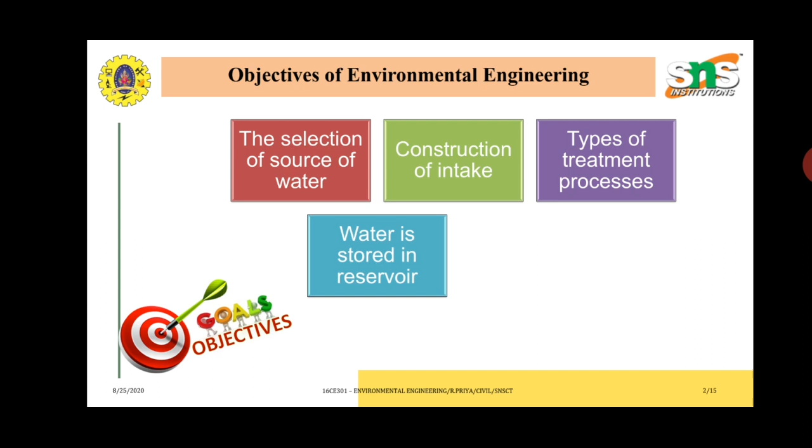After that, the construction of intake. From the river as such, you cannot distribute the water to the entire household. We have to construct an intake structure near a river and store the water there. After storing the water, it has to undergo various treatment processes in order to meet the standards of drinking water. The treated water will be stored in a storage reservoir, and finally it is distributed to the various households.

We have various types of distribution systems for towns, cities, metropolitan cities and cosmopolitan cities. For each and every place we have various types of distribution system, and based on those distribution systems, we will be distributing the water to the households.

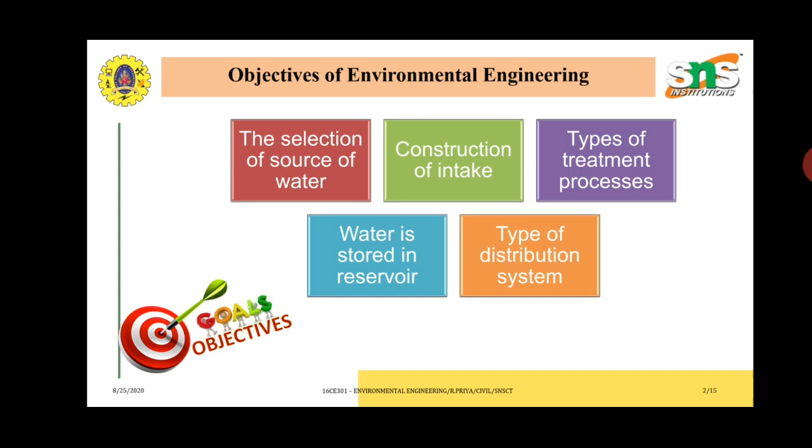I have told you that there are two main categories of environmental engineering: water supply and wastewater engineering. After we use the water in various sources such as industries and households, the wastewater will be released from the households and industries. That wastewater will have many toxic materials or toxic chemicals in it. So it is our duty to reduce the toxic chemicals from the water and dispose it into the land or the river. That is known as wastewater engineering.

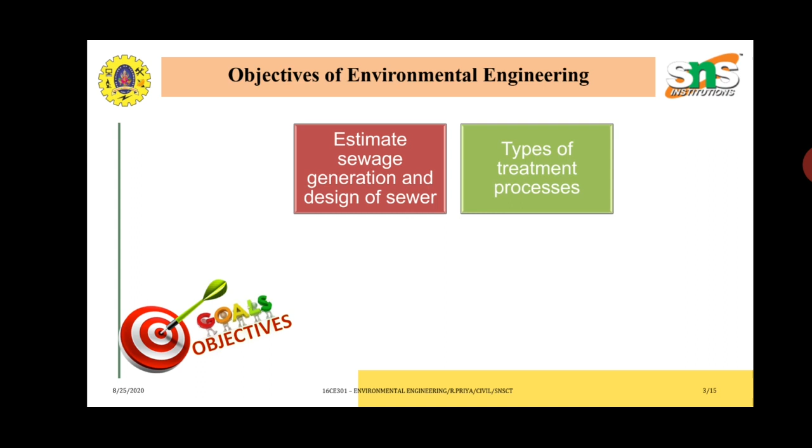In wastewater engineering, you will be studying how to estimate the sewage generation from households, how to design a sewer, the types of treatment processes to be carried out for the wastewater coming out from industries, and the design of various treatment plants. Both together are known as environmental engineering. So here you will be studying about water supply and wastewater, and both combined together is known as the environmental engineering paper.

Seeing the career, you'll know about various government jobs, right? In PWD you'll have various vacancies for those who have pursued civil engineering, because you'll be studying environmental engineering. In PWD, your main role is to estimate or design the various treatment processes, design the various distribution systems, and monitor the quality of the water. So this is why you are studying the environmental engineering paper in civil engineering.

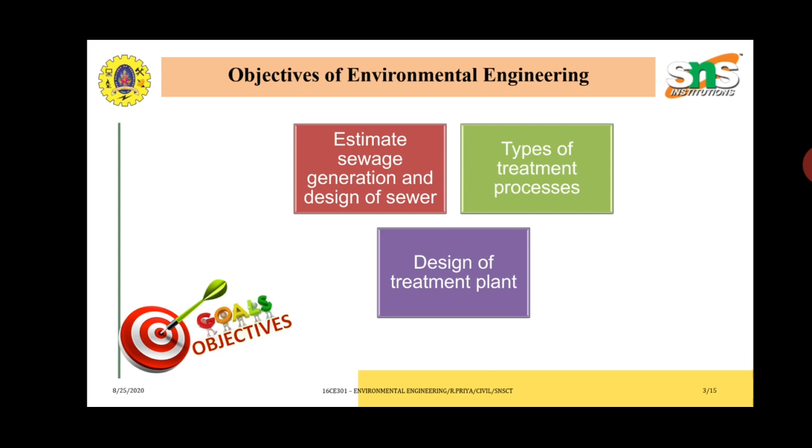So getting into the main units, here you'll be having 5 units. In unit 1 you will be studying about the sources, quality and demand of water. The various topics that you'll be studying are the importance and necessity of water supply engineering, the various sources of water, their suitability and the choice of the source.

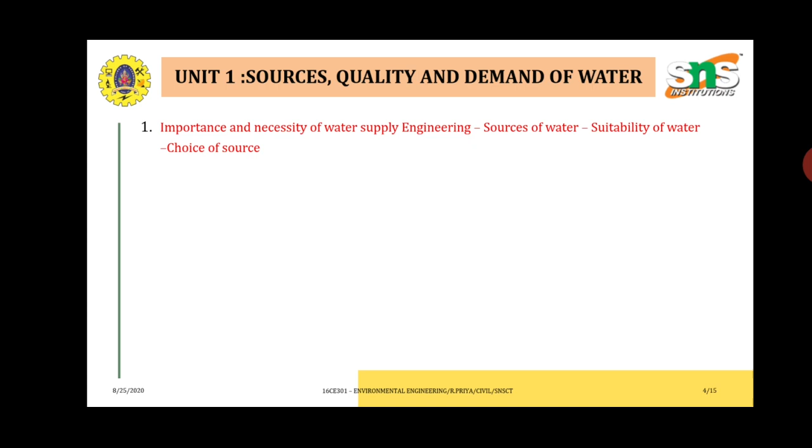Next comes the types of demand of water and how you will be computing the quantity of water. The next topic will be fluctuations in demand and the factors affecting demand. And you'll be studying population forecasting, how you will forecast the population and the various methods to forecast it. Then comes the impurities in water: what are the various impurities in water and how we have to collect water samples for testing.

Then comes the physical tests. What are the various physical tests available to find out the quality of the water, the various chemical tests, and the various biological tests, and the standards of the quality of the water. So these are the main contents that you will be studying in unit 1.

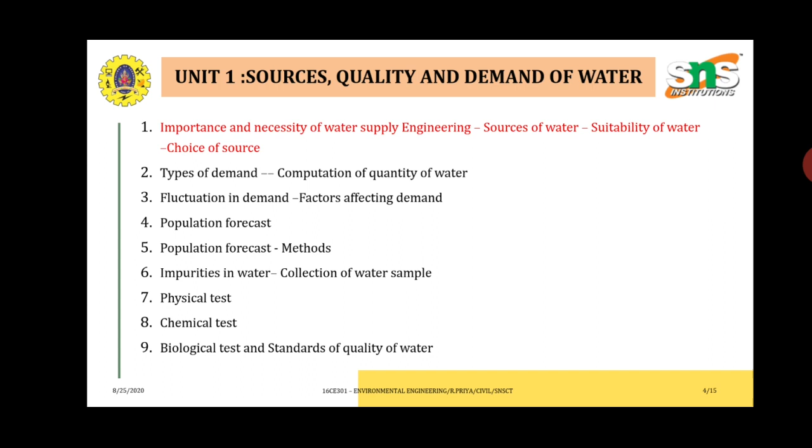So let us see the first topic: the importance and necessity of water supply scheme. What is the main importance and necessity of a water supply scheme? Why do we have to incorporate a system known as a water supply scheme? We all know that 2/3 of the human body is constituted of water. Not only us, plants, animals and all other living beings use water. In day to day life, water is one of the most important things we consume.

The water which we are consuming should be very good quality, it should not contain any impurities. In order to remove the impurities from the water and maintain the standards, this water supply scheme is very important. Next, the utility of water is enormously increasing, and without a well organized public water supply scheme, it is impossible to run our present life. Even a single day without water, the whole system will be spoiled.

The next important one is to provide wholesome water, meaning water which is fit for drinking purposes. In order to provide wholesome water, it is very important to incorporate the water supply scheme. Then we use water for various purposes such as drinking, cooking, bathing, washing, etc. for household things. To do all such works, we need water. So a good water supply scheme is very important for each and every household and also for industries to run day to day life.

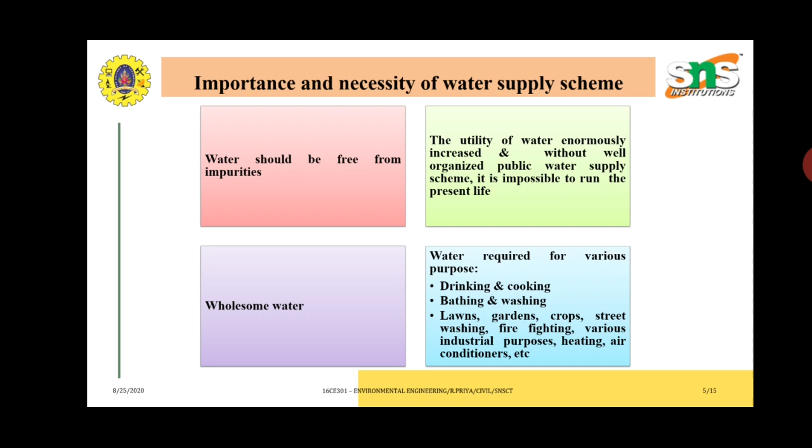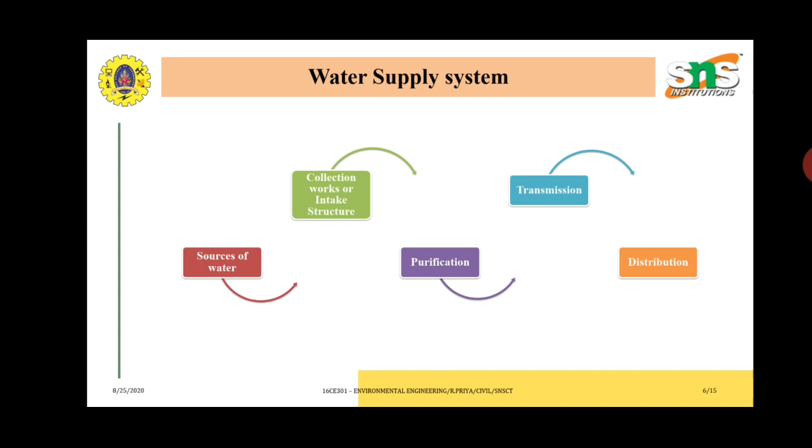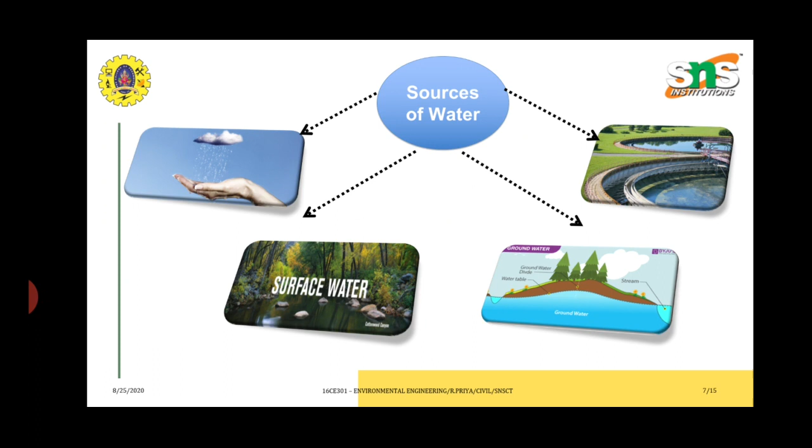So let's see about the sources of the water. The main sources of water are rainfall water, surface water, subsurface or underground water, and water from reclamation. Let us see them one by one in detail. Coming to surface water, the first type of surface water available is ponds and lakes.

So what is meant by a pond and a lake? It is nothing but a depression formed within the surface of the earth. When the depression gets filled up with water, it is known as a pond or a lake. The major difference between the pond and the lake is based on its size. If the size of the depression is comparatively small, it may be termed a pond, whereas if the size of the depression is large, it may be termed a lake. The pond and the lake mainly get water from surface runoff and from springs.

Coming to the quality of the water of the pond and the lake, the quality is really very good. It has a self-purification process, so it has very good water. Larger and older lakes have purer water compared to smaller and newer lakes. Let us see some advantages and disadvantages of ponds and lakes. The main advantage is self-purification. It removes the suspended matter, the unwanted colors, and the unwanted bacteria.

The disadvantage is that in some still water of lakes and ponds, there is growth of algae, weeds and other microorganisms. This leads to bad smell, taste and color of the water. This is one of the major disadvantages of ponds and lakes. So ponds and lakes are not much preferable as a source of water for a public water supply system. Larger lakes can be preferred, whereas smaller lakes and ponds cannot be preferred as water sources.

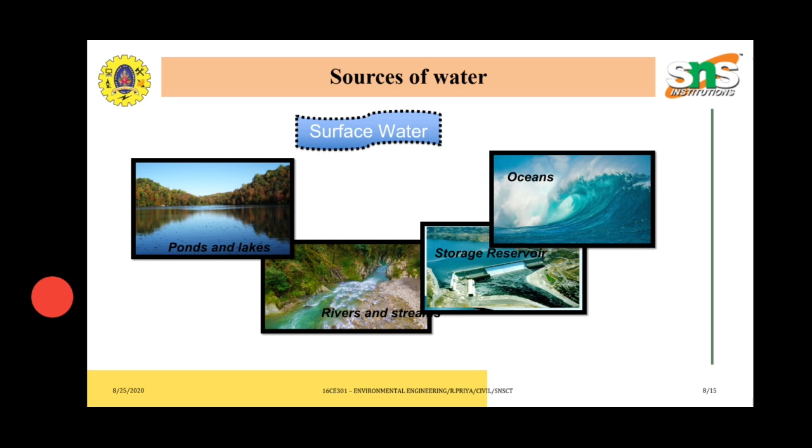So next, coming to the underground water sources. The water which gets stored in the groundwater reservoir through infiltration is known as underground water. We are using underground water for household purposes. Each and every house is having underground water usage nowadays. So let us see what are the various underground water resources.

The first one is the springs. Springs are the one in which, when groundwater is brought to the surface by some natural means, that is known as spring water. Okay, so by means of the spring we are getting water.

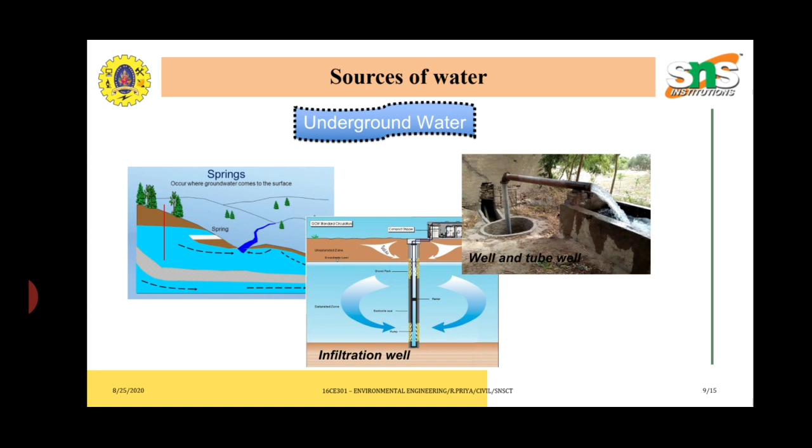Then next one is the infiltration well and infiltration gallery. The groundwater is tapped by artificial means, by constructing infiltration wells and infiltration galleries, and also by means of wells and tube wells. So these are the artificial means of saving the water. In India, largely this system is very much useful, so it has a great scope in the future.

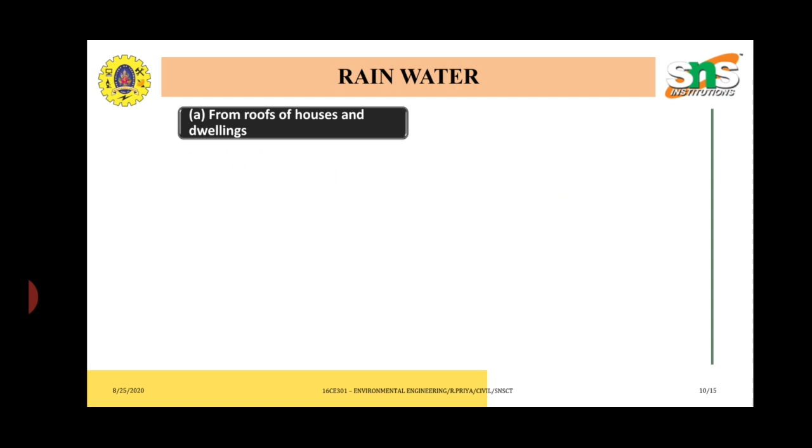So next, coming to the rainwater sources. We are saving the rainwater by two means. One is the rainwater coming from the roofs of the house and the dwelling. This water is stored in a small underground tank for small individual supplies.

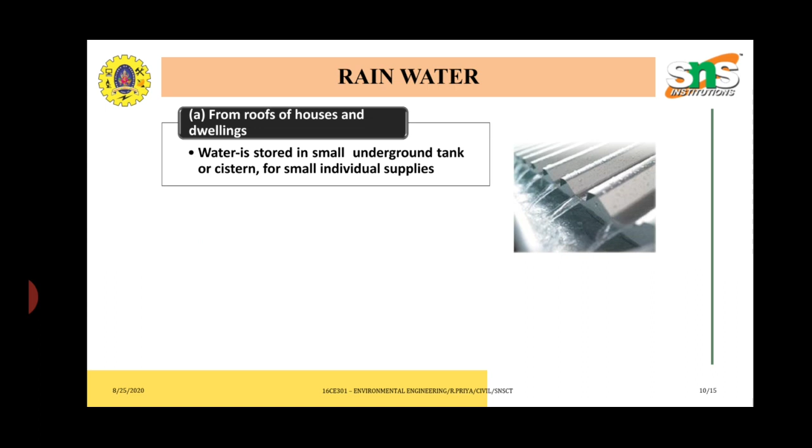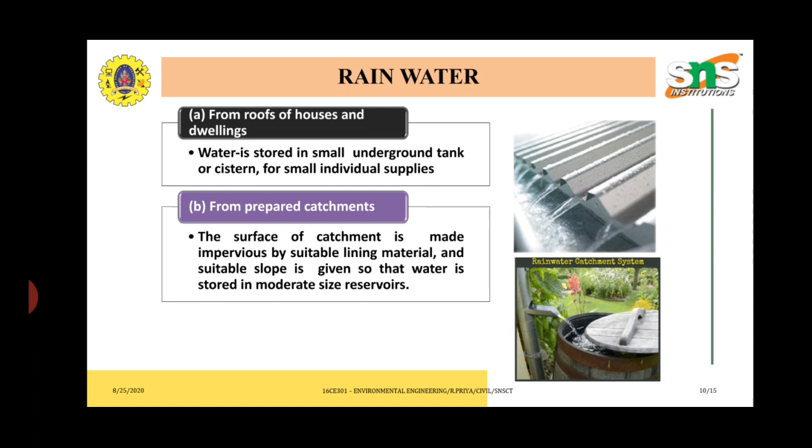So next one is from catchment areas. By using a suitable lining material, we are making a catchment area, and by giving a suitable slope, the water is stored in a moderate size reservoir. By means of this, the rainwater is saved and it is used for household purposes. So it is also one of the sources of water which can be used in a minimal amount.

So next one is water obtained by reclamation. By reusing the water, it can be used to a large extent. The first process is desalination. The saline or brackish water can be treated and it can be used for drinking purposes. There are various methods used in desalination, such as distillation, reverse osmosis, electrodialysis, freezing, and solar evaporation.

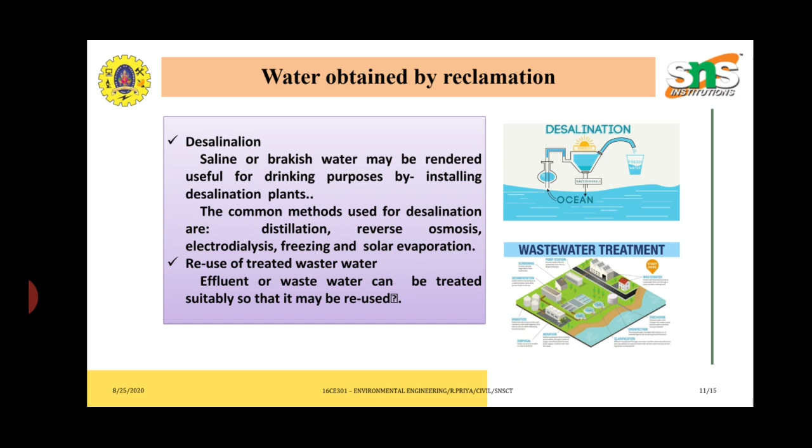The next one is reuse of treated wastewater. Many wastewaters are coming from the industries, so we can treat it and reuse that water in the industries, so that we can reduce the usage of water.

So the next one is, what are the various sources of water? What are the main sources of water and what are the subdivisions of those?

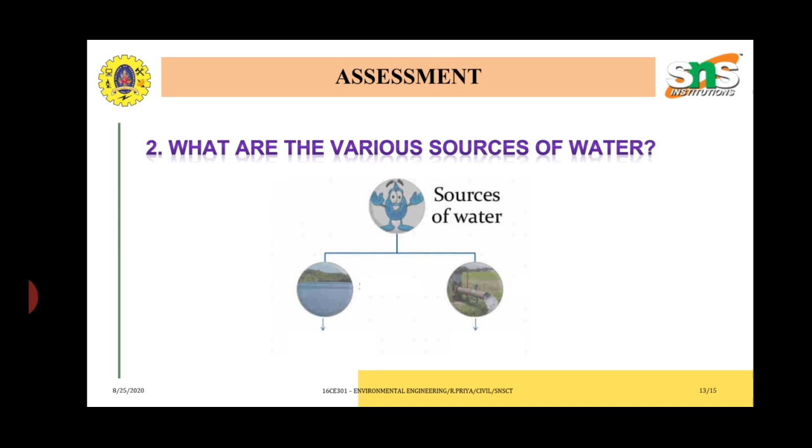Okay, so in today's class, we have seen what is environmental engineering, why we are studying environmental engineering, what is the main objective of studying environmental engineering, what is the importance and necessity of environmental engineering, and why we want a good water supply system. What are the various processes available in the water supply scheme?

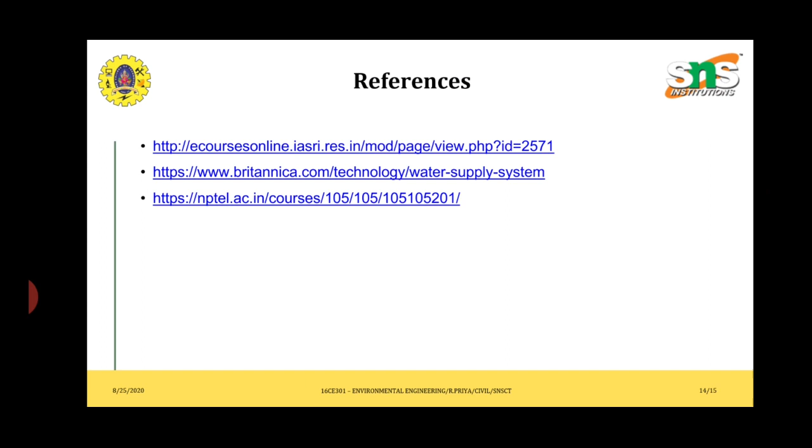Then coming to the various sources of water. We have seen four main sources of water, and what are the various advantages and the various qualities of the water in each source. So this is all for this class.